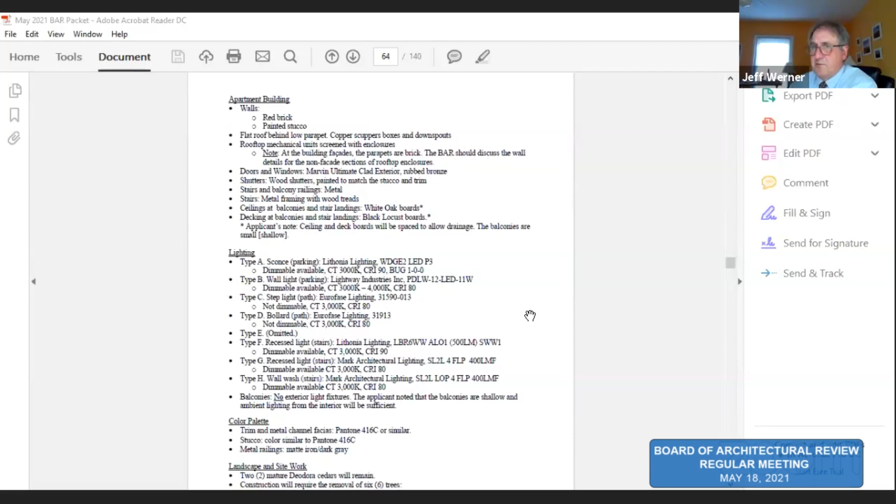It was the manor house of a 100-acre farm that is now the Preston Heights section of the city—a typical 2-story, 3-bay, double pile, white weatherboard Greek Revival details house. It is situated sideways on the remaining parcel, facing south, basically facing the back of the brick apartment buildings on Grady Avenue.

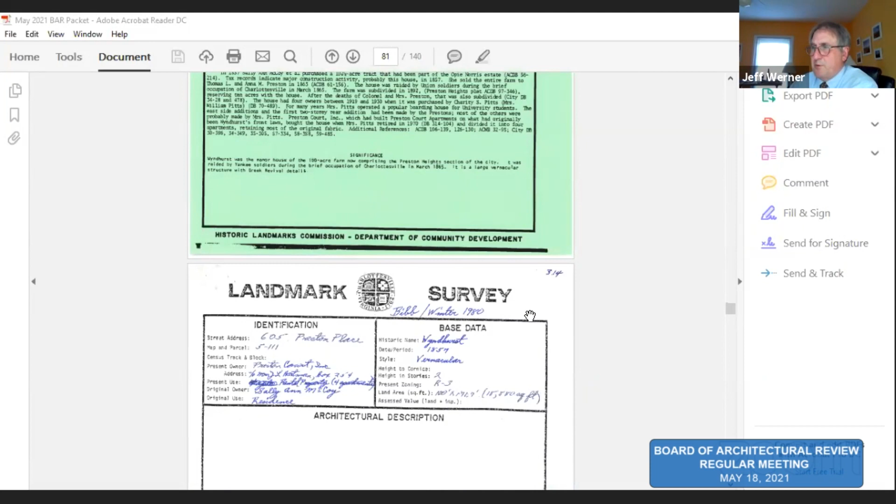So again, this is a COA request for construction of an apartment building, including parking, landscaping, and site improvements. I've summarized in the staff report the materials, some of the details, the lighting, color palette, and landscaping.

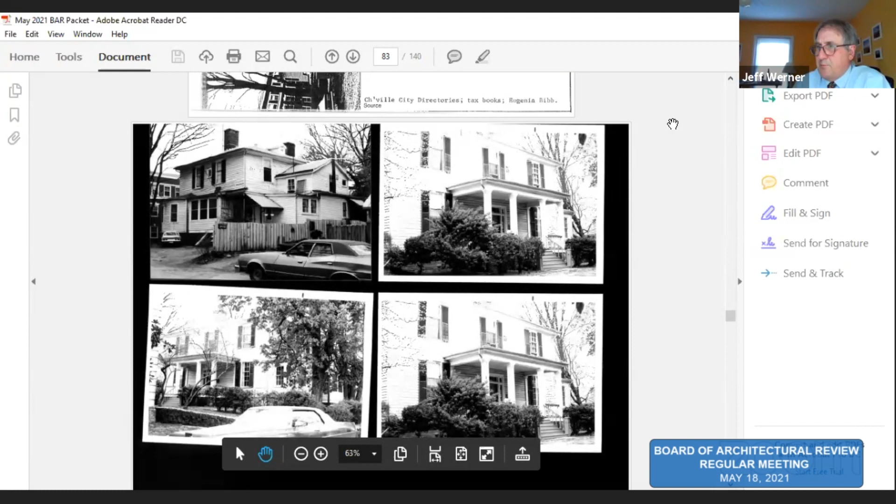I know that when the prelim was discussed, there were questions about the landscaping. There are 2 large cedars on the west side that will be retained. Construction will remove 6 trees: a 36-inch oak, 3 8-inch dogwoods, a maple, and one described simply as 'tree.'

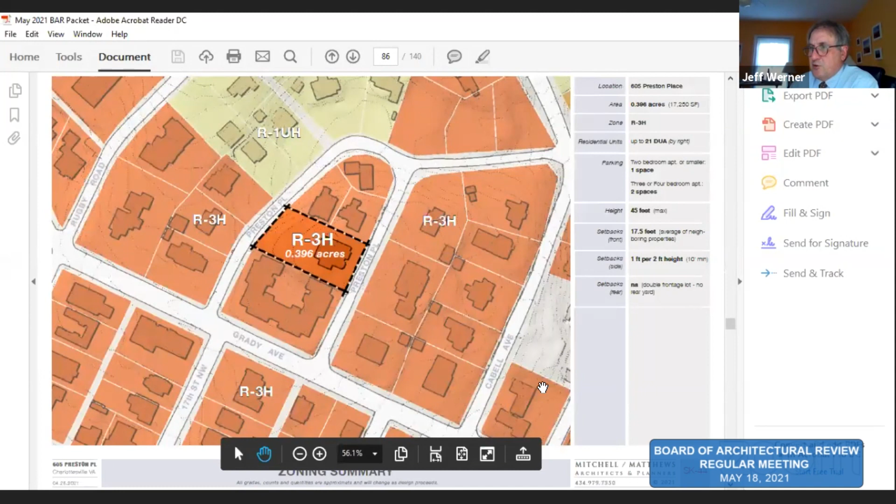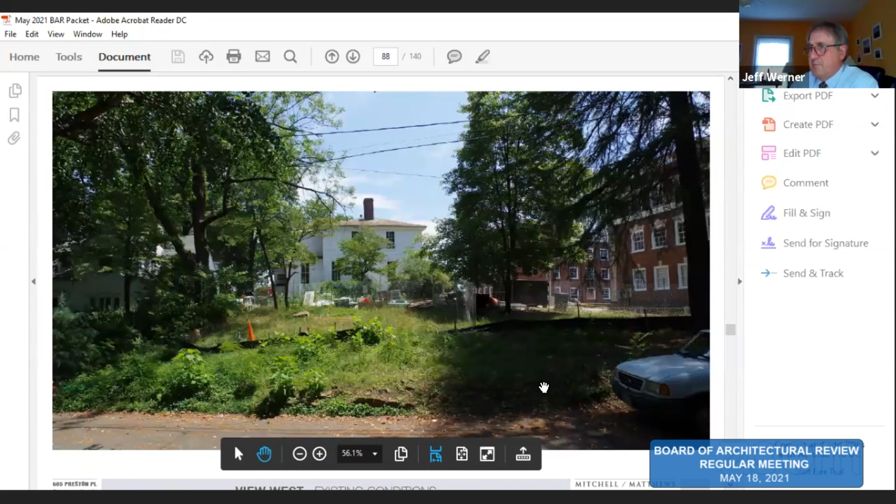The new planting includes 15 trees: black gum, shagbark hickory, and white fringe tree. I've addressed the landscaping per review of the city's master tree list. White fringe tree is not identified on that list.

However, it is identified elsewhere—in fact, the Virginia Native Plant Society named it the Wildflower of the Year in 1997. Mr. Gastinger can maybe shed some light on that, if you want to stay out.

The parking below grade access will be off of Preston Place on the west side. There will be a couple of parking spaces still on the surface there.

Some questions have been raised about the historic designation, so let's be clear. Wyndhurst, the house and property, is listed on the Virginia Landmarks Register and on the National Register of Historic Places, both as an individual site and also as a contributing structure to the Rugby Road University Corner Historic District—that's the historic district on the state and federal listing.

Being a contributing structure on the state and national register carries no less importance than being individually listed. The term 'contributing structure' is used in the national and state register to express that a district is important due to the sum of its contributing parts.

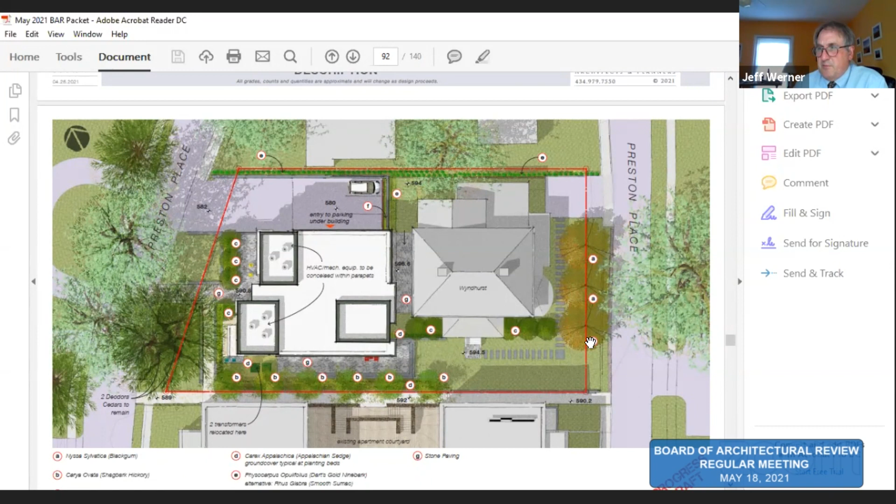However, Wyndhurst being individually listed on the state and national register certainly expresses the importance of the resource in and of itself. But the thing that matters relative to the BAR's purview and oversight is the local designation.

Back in September last year, you all held a preliminary discussion. I've included the notes in the staff report if you want to refer to them—some of them are a bit informal, but still, in general, the applicant walked away with...

The primary question was, is this thing worth bringing back to the BAR, or is it dead on arrival? And the response was that you all would consider it further—you didn't say you would approve it or anything, just that you would consider it further.

As I mentioned, I went through this—I've spent a lot of time looking at this relative to the design guidelines, since it's simply a different set of circumstances from what was presented in the prelim.

One of the things that will certainly be raised is the encroachment of this structure onto the historic house. You all have guidelines that begin to address that, but to be clear, when it comes to new structures, the guidelines are fairly clear about allowing things that are complementary but of a more contemporary design.

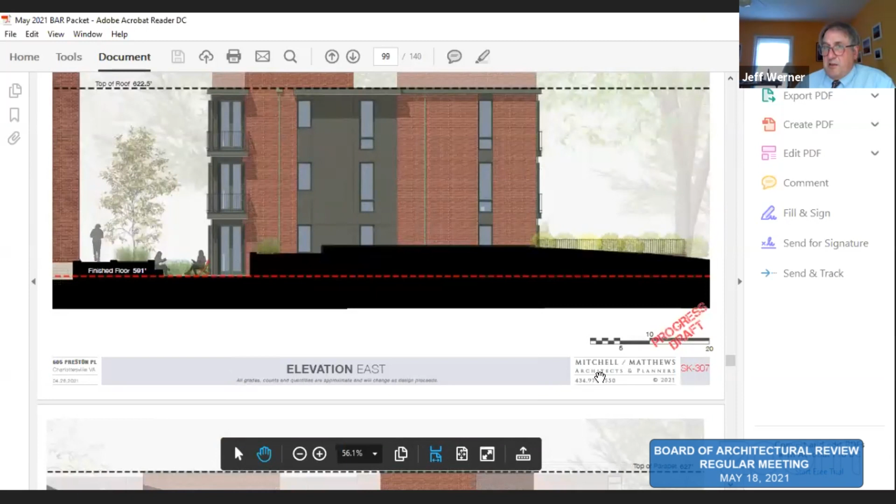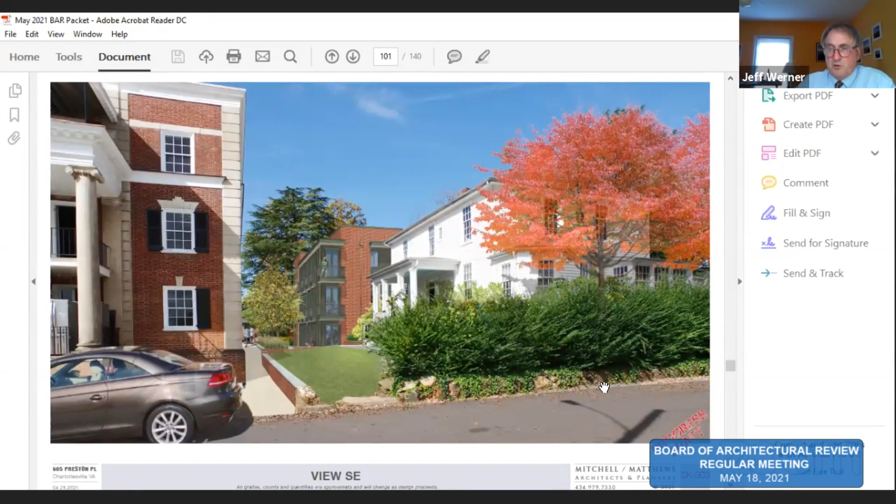Talked about the landscaping, lighting levels. Everything seems to fall within at least what was presented. They have lamping that's available within our guidelines, but I think you all should make clear in any motion that the lamping will comply, and that would be dimmable, color temperature not to exceed 3000K, color rendering not less than 80, preferably not less than 90.

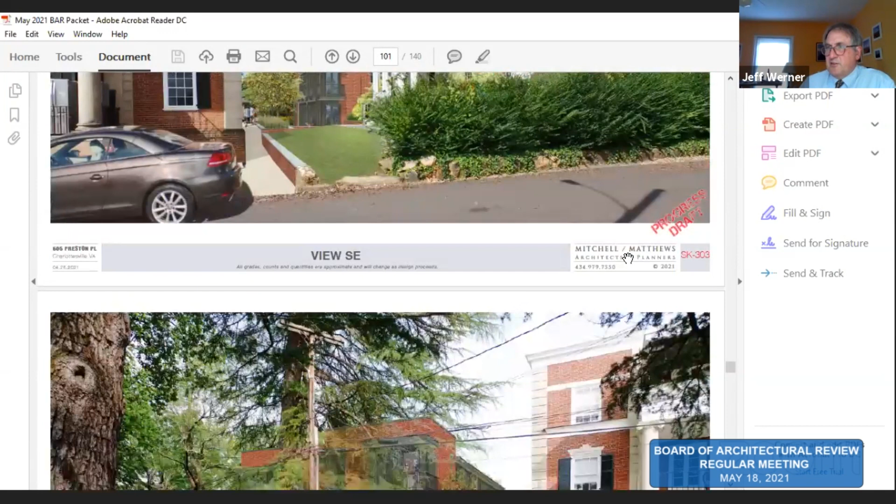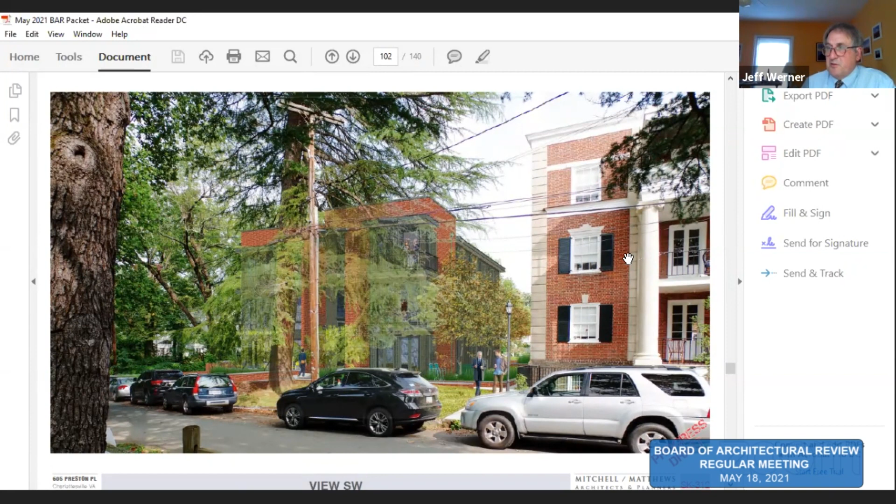Also, because in the parking lot discussion that was referenced back to the Secretary of the Interior's Standards for treatment of historic properties, I've included that here relative to designing new on-site features, so you can refer to those directly. It does say designing new exterior additions to historic buildings, or adjacent new construction, should be compatible with the historic character of the site and preserve the historic relationship between the building or buildings and the landscape.

I think we all can acknowledge that the historic landscape of Wyndhurst has somewhat been eliminated, except for what's left on the site, and to what extent and how you interpret that in the context of these guidelines is for your discussion. Staff does recommend approval if it's considered.

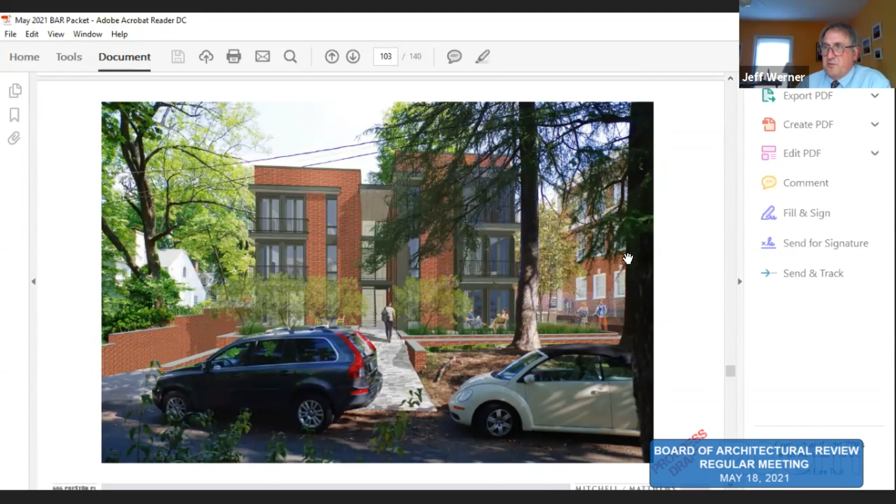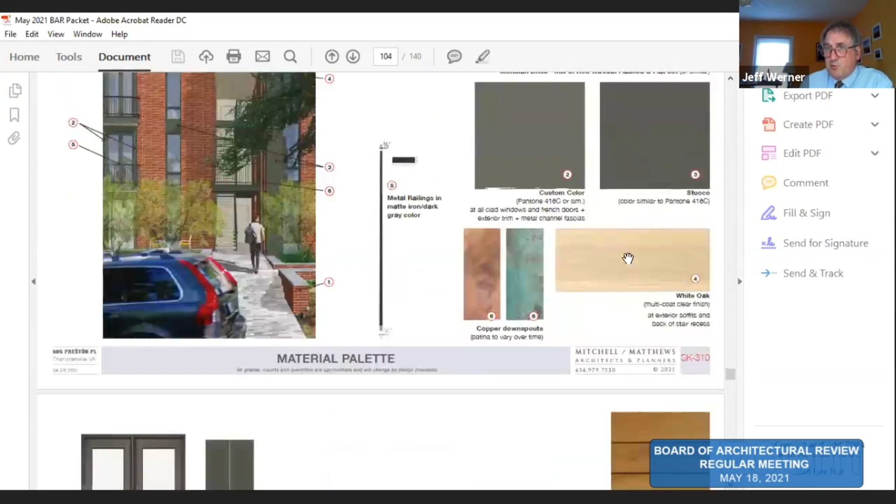I will say I think there are still some things that need to be answered. There are some questions, and I think folks in the neighborhood are going to ask some questions. So this may not be heading for approval tonight, but I wanted to say that staff would recommend that, again, the comment about the lamping.

We always look for an opportunity with new projects to underground the electrical service, so that could be pursued. Also, there are some existing stone walls. Now they may be within the public right of way, but I think we need to clarify the curb, the stone curbs, any remnants of stone walls, regardless of being in the public right of way. At the apartments just south of this, we had a lot of damage to the curbs, and so the BAR should address that and require documentation prior to any construction, and that if anything's damaged, it's repaired or reconstructed.

I wanted to say that no site plan has been submitted for this. One will be required, so you all know that when a site plan goes through, often there are issues, utilities, et cetera, that cause something to move, change, or be modified. So again, in consideration of the COA, please understand there might be subsequent revisions or modifications to what was reviewed, and you all should make clear that could very well require a new application for you all to review.

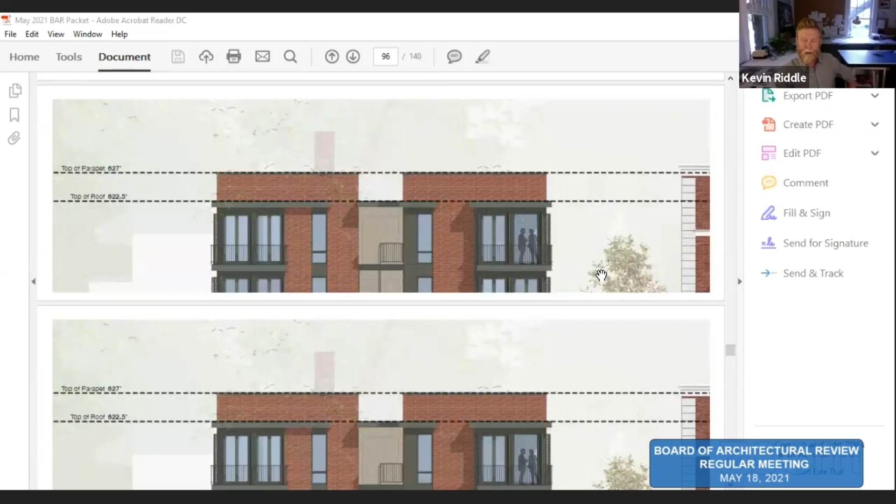Okay, great. Thanks, Robert. Hi, my name's Kevin Riddle. I'm representing the owner of this project. I have John Matthews here with me, so if you hear him pipe in, don't be alarmed. I can go through the packet pretty quickly. Jeff's summary was great. Thanks, Jeff.

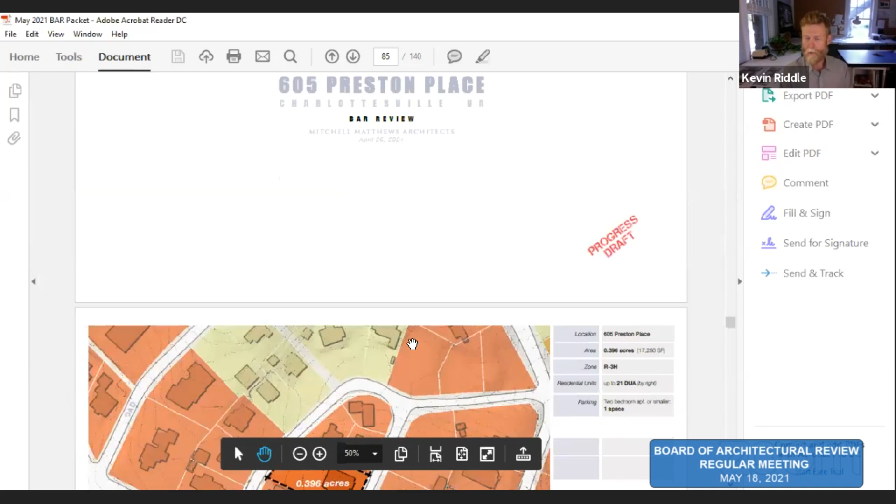It's a proposal for a small apartment building, 3 stories. We did bring this to you informally back in September of 2020, and it's evolved quite a bit since then. The significant changes would involve the parking.

Originally, we had proposed a lane that would cross from west to east, connecting Preston Place along the southern boundary, with parking partly under the building on the south side. We have changed course, and now the parking is located under the building, accessed from a single drive at the northwest portion of the property.

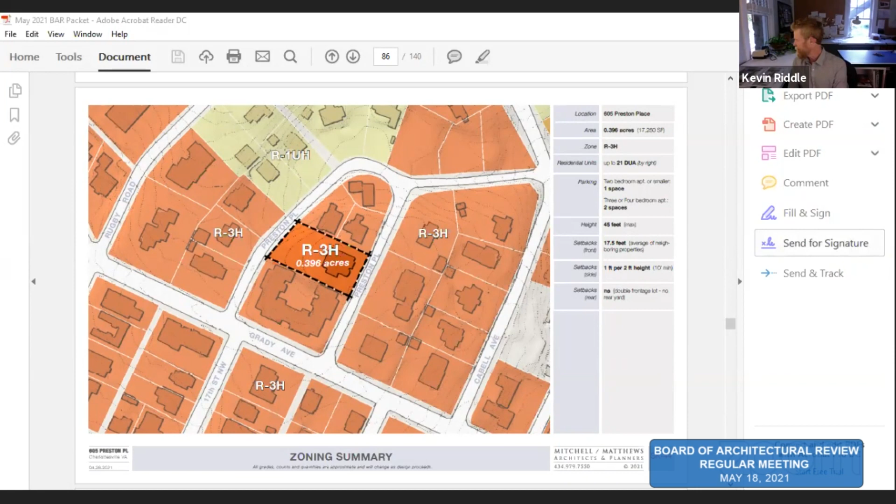Robert, if we look at the site plan, maybe we could advance to that. We can talk about this, and maybe go to the plan at the parking level, I think 2 pages down from this one. There we go. So you can see where cars can enter the site from Preston Place and then park most of them under the building. There are 3 spaces out at the end of the drive, so the parking is mostly concealed from view.

Now if you go back to the site plan, Robert, 2 pages previous. The outline of the building, the footprint and the massing, have been refined and evolved rather significantly since our last meeting. It's a building that's stepped back, its northern wing from the southern wing, and there's a large stair that accesses the apartments in a deep recess. So from the front, from Preston Place, looking west toward the building, what you see appears to be kind of 2 volumes, more so than a single building.

As Jeff mentioned, there are quite a number of shallow balconies. Since we first brought the project in September, we've had a number of meetings on site. We've met with the neighbors, I believe, on at least 4 occasions. We've had this out there, and we've been discussing our process with everybody who lives nearby as much as we can. We've listened to the neighbors. We certainly haven't accommodated all of their concerns with the changes here, but we've tried to address what we can while still keeping the project viable.

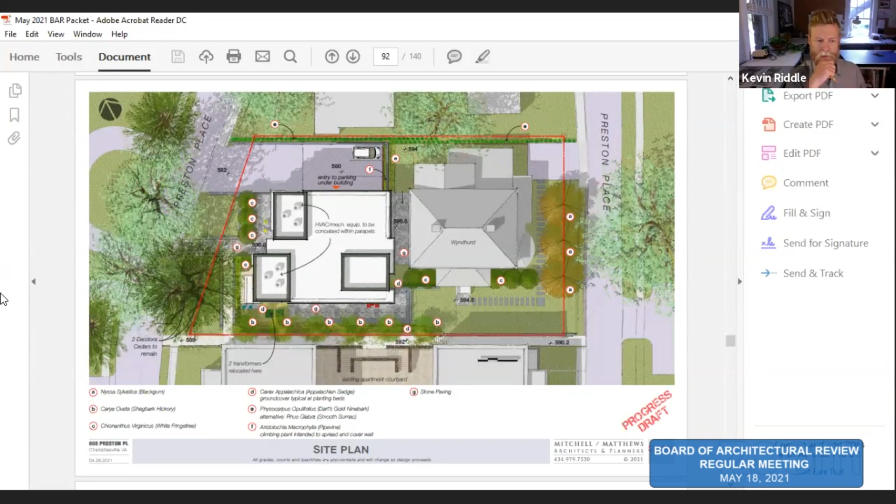Some other things to mention: the 2 most prominent trees on the site are the Deodora cedars at the southwest, and we plan to keep those trees and do our utmost during construction to preserve them. Trash cans will be located underneath the building, except on trash day, so they'll be out of the way. There's a couple of transformers currently located close to Preston Place, and those would be relocated further in and largely concealed by the landscaping.

The site immediately adjacent to Windhurst, we don't plan on doing very much there. There are some plantings proposed, but by and large, the intent is to leave it largely as it was for decades, since the 1920s up until recent construction. So there's a rather short lawn in front of it. We do show a modest path of stones that would lead around Windhurst and back to a couple of parking spaces at the northeast off of Preston Place.

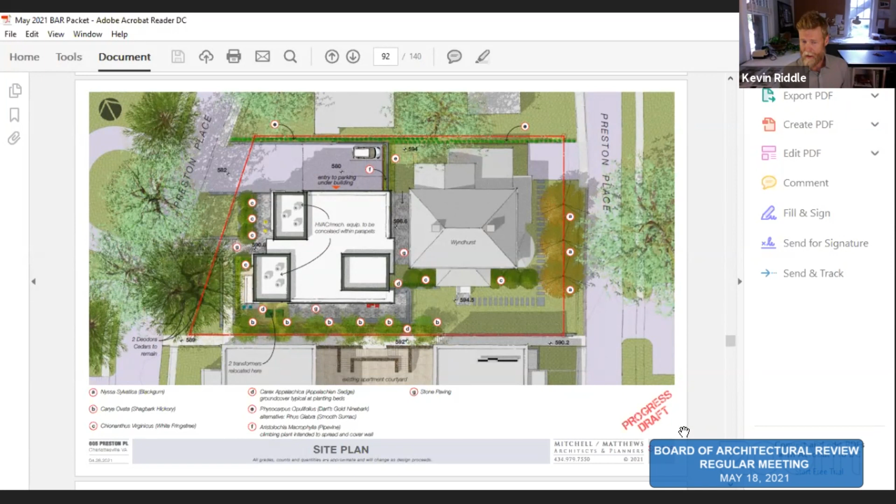And then as Jeff mentioned, the materials in the proposed new building, we believe them to be compatible with what's elsewhere in the neighborhood, and I think the illustrations largely speak for themselves. So I'll leave it there, and we look forward to your comments. Thanks.

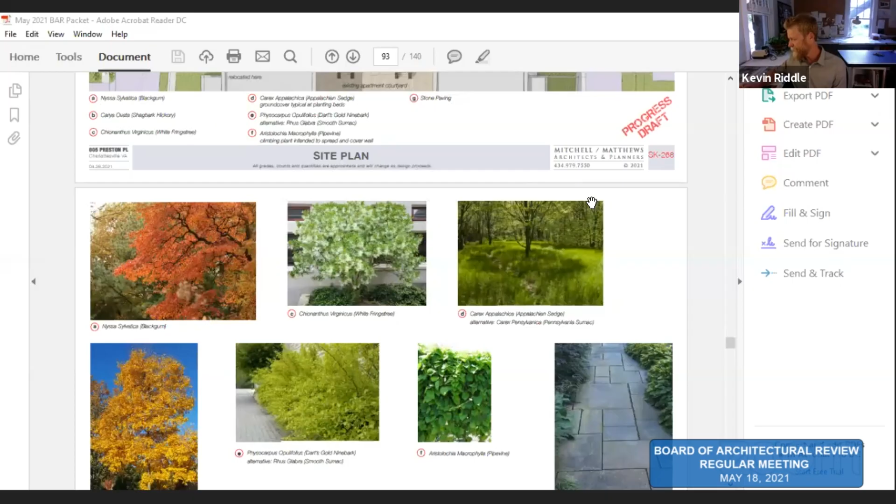However, there are enough places, like if you look at page 17, our view from the southeast, there are places where the parapets are going to be turning and I believe visible. And so it would seem to us that continuing to use the same brick cladding in those locations would be pretty important to preserve this appearance. And we know that that's going to imply some structural work that maybe would not be necessary otherwise, but that's okay if that's the case.

And the wood soffits and the wood underneath the balconies, do I understand correctly that you intend to drain water through the top surface of the balcony and have it percolate through the undersides? Yeah, the little section detail there, perhaps it divulges a little too much with the construction approach. It's a little bit of a placeholder, honestly. I think, in fact, we don't really want water to be dripping through or spilled drinks coming through from one balcony down to another. So our intention actually is to have that balcony floor covered. I don't think it's going to be spaced. I think we're going to slope that slightly to drain water away from the balcony and not to encourage it to get into the cavity space.

Okay. And so I think architecturally, our intention remains basically the same, which is that you would see a light colored wood like oak as the soffit material on the underside. Okay, but it wouldn't... that answered the question.

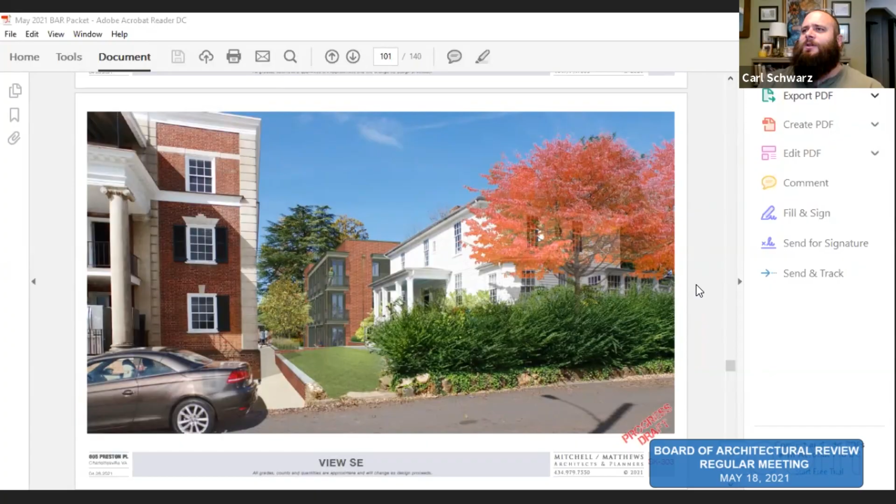Can I ask a minor question? Your lighting plan for the little bollards may not be quite coordinated with the final site plan. How are those bollards mounted? Are they in the brick wall? I think the intention with those bollards is that they would actually be mounted to the walk, the surface walk.

So there would presumably be a flexible conduit used under the walk before it's poured, and these bollards have a base that can be mounted to the walk, with the bollard itself clipped or screwed to the top. Is that not a tripping hazard? Yeah, they are a little more prominent than, say, a recessed or flush walk. It's true, but this is based on an early round of discussions we had with our lighting consultant.

So this is what we are going with for the time being as a lighting strategy there. But I understand your concern that they are kind of sticking out there, it's a somewhat narrow walk. I think aesthetically they're great, I was just curious. I mean, that's one we'll confront ourselves as we get further in the process, and if we decide to go with a different option, we know that were this project to be approved, we would have to update you if there was a change in direction with that lighting.

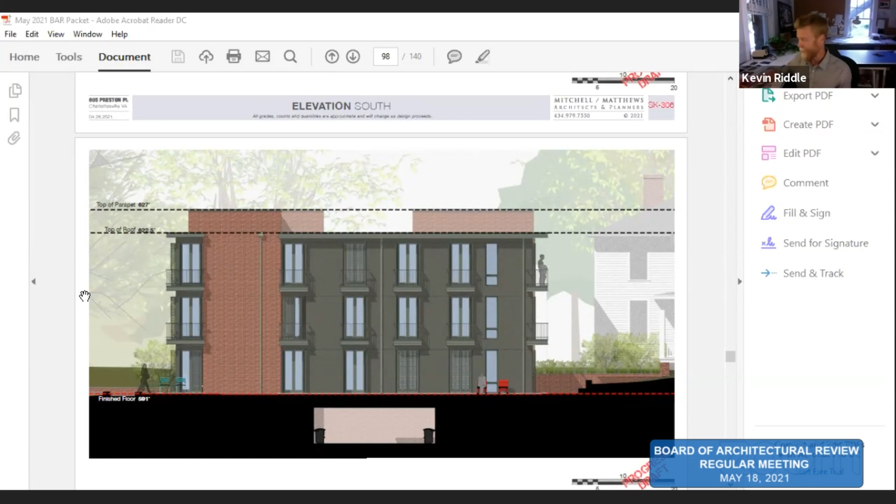And as you get over to Windhurst, it's about 4 feet -- when you get to the landing at the bottom of the wood stair, it's about 4 feet up from what would be the patio area, the little terrace adjacent to the south and southeast portion of the new building. Great, thank you.

I do have a quick lighting question about the wall packs, the wedges, the A fixtures along the parking lot wall. I was wondering, since perception of brightness is also related to color temperature, if it would make sense to knock those down one temperature range, like to 2700, keeping your basic lighting package, just to help minimize light bounce at night going down that driveway, because that surface will bounce a lot of light. Yeah, that sounds fine to us.

I don't think it's necessary underneath the building, although, again, I think the more constant the light color and temperature, the better it is from a visibility standpoint. Okay.

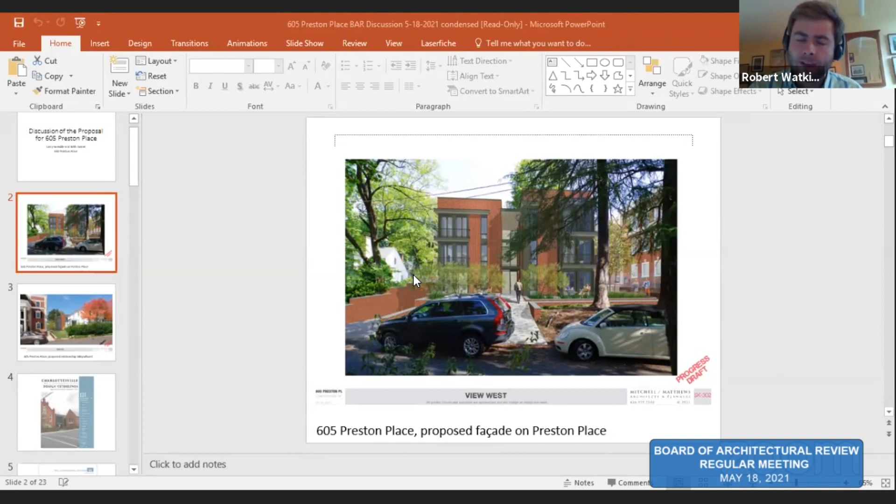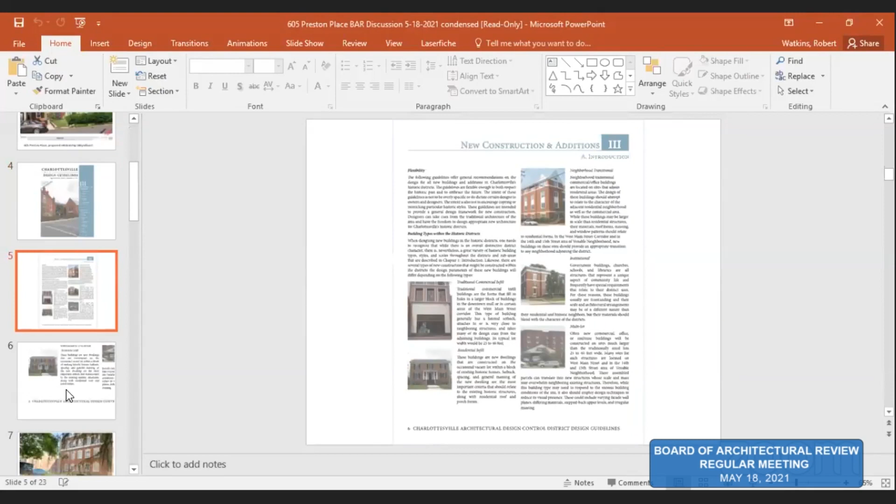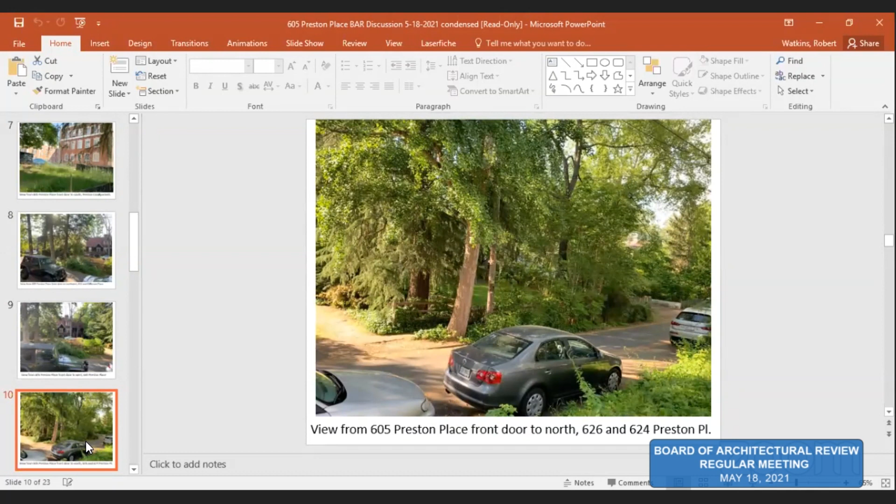I just want to demonstrate that this is an area of small wooded lots. Could you go forward, to the next, and to the next. This is the little cottage that's right next to the building site, and you can see how very close these places are.

There is a little wall immediately to the right in the foreground. Just on the other side of that will be the driveway into the basement parking garage. It's just a matter of a couple of yards max from this house, it's on the line. Could we go to the next?

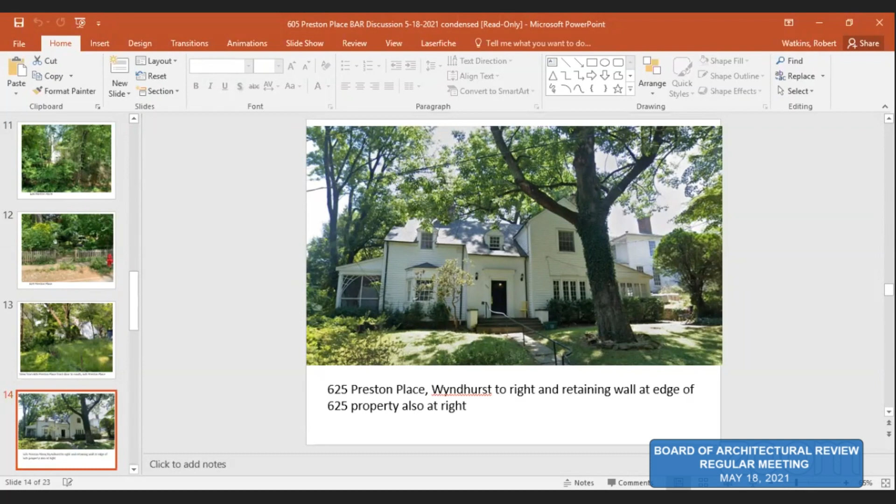And this is the view. The building itself is not an apartment building, so the context in which they are inserting this apartment building is a neighborhood of two-story residential buildings, not apartment buildings, and they are not student apartments. This is a residential neighborhood of mostly professional and retired people.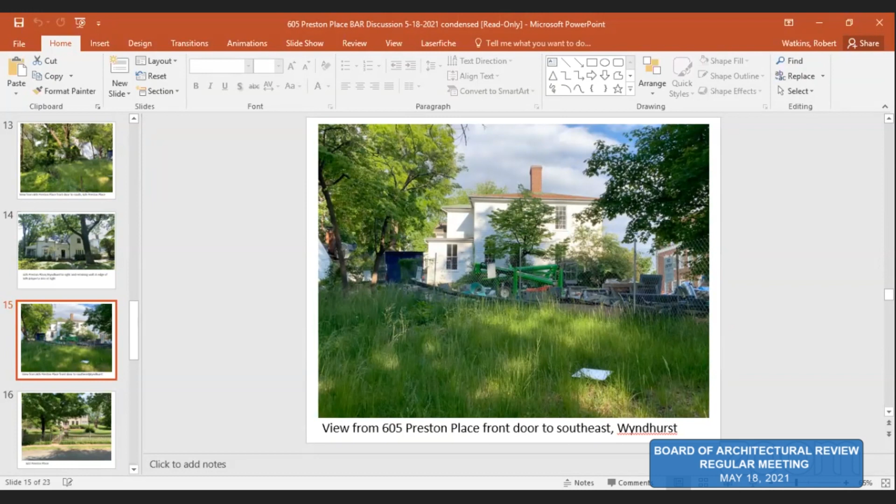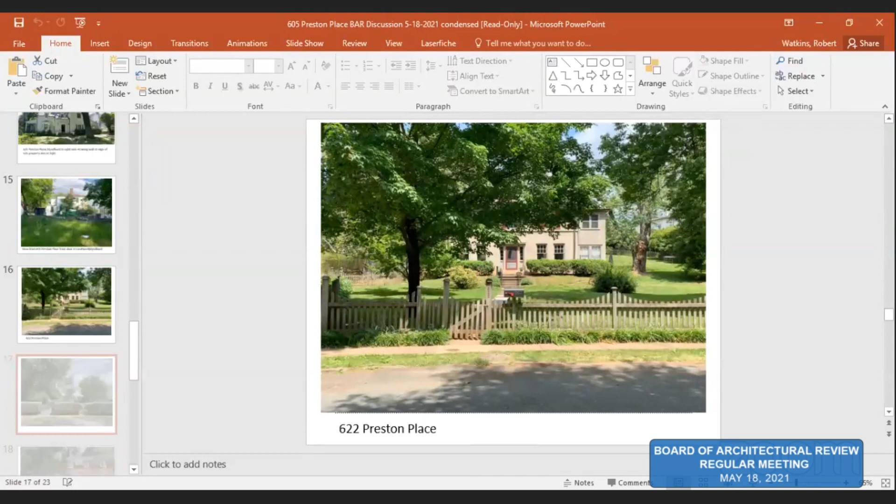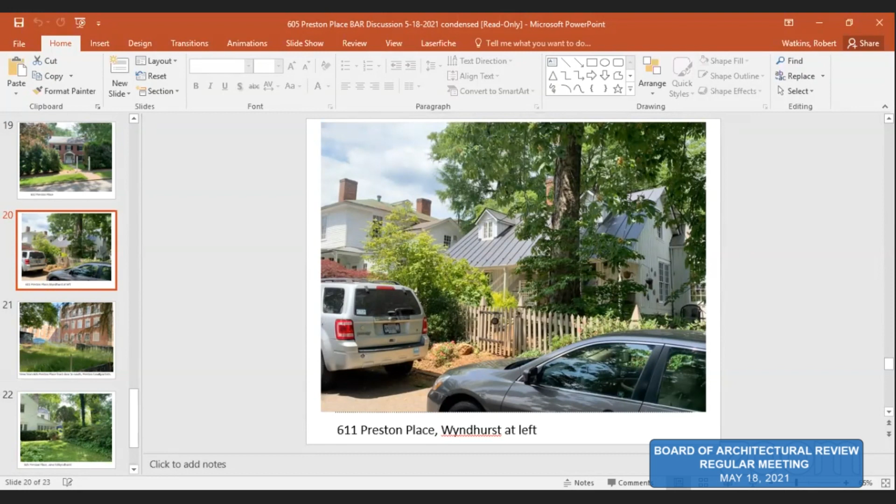Could we go to the next, please? Mr. Good, I'm about out of time. These are just the other houses in the neighborhood. Show the next one, Scott and Christine's house, and next, and next. This is Scott and Christine's house. Again, I view it as completely out of scale with the proposed building, and completely out of relationship to the materials they're proposing.

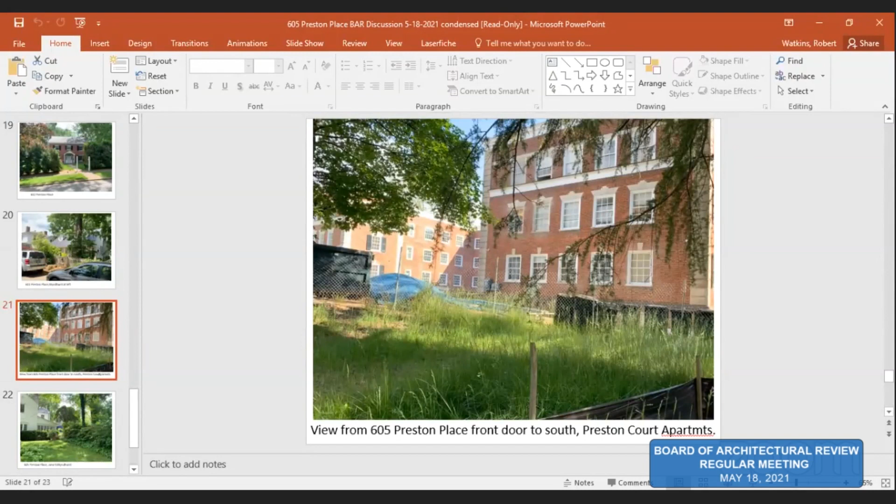I also want to say the neighborhood is totally against these balconies. They are a source of constant noise and irritation from the Preston Court apartments, and there is absolutely no reason why they need to be directly opposite our house. That's my comments, thank you.

Thank you for your help with that. Thank you very much. Contact is always good. May I speak? Yeah, I guess it's two people. Yes, sorry, yes, thank you, I really appreciate it.

I'm Elizabeth Turner, I live at 630 Preston Place. I want you all to know I'm not against adding housing units to Charlottesville or to our historic district, but I am against this proposal. I do not believe it is appropriate or that it has an appropriate design. I think the roof line, the fenestration, the materials are wrong, and they do not complement any of the other structures.

The only structure they want to reference and emulate is the Preston Court Apartments, which is a behemoth, totally out of scale, and it does not help. It is also not appropriate to the setting, to the historic structure this is the setting for, to the hill, to the cedars, to the historic relationship.

And it is that relationship with the landscape that I really want you all to think about. The terrace and the house itself need to be acknowledged, and a place can be put for more housing units on that lot if that's what the zoning calls for. But I think the appropriateness, which is your purview on the design and historic preservation angle, is something we're counting on you to really think about and to acknowledge.